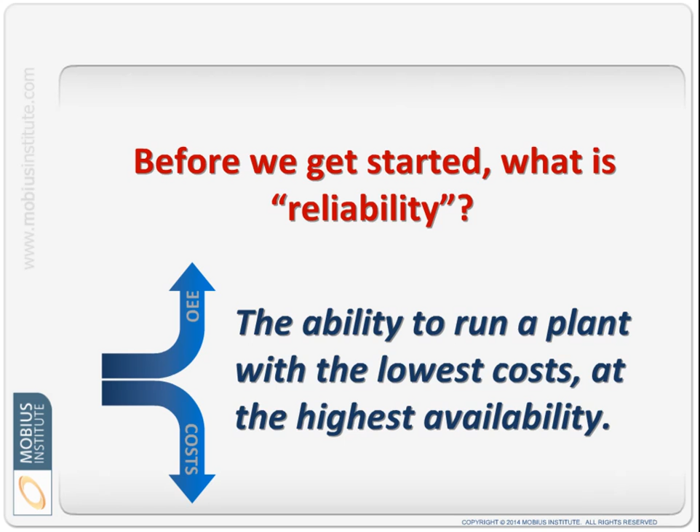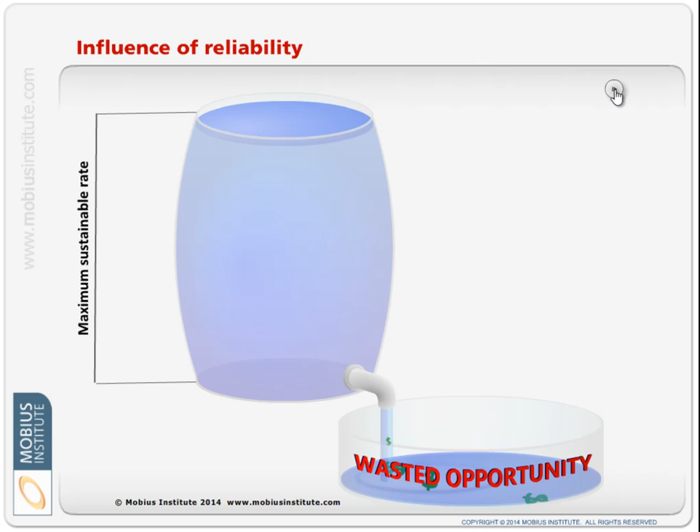Now, one way we could look at our plant is that it ultimately has a maximum sustainable rate, a maximum amount of product that it could ever produce. Now, of course, your particular situation could be different, whether you're a sewage plant or an iron ore mine or a power station. Obviously situations differ, but there's a maximum amount that you could operate. But then we have to subtract from that the scheduled downtime.

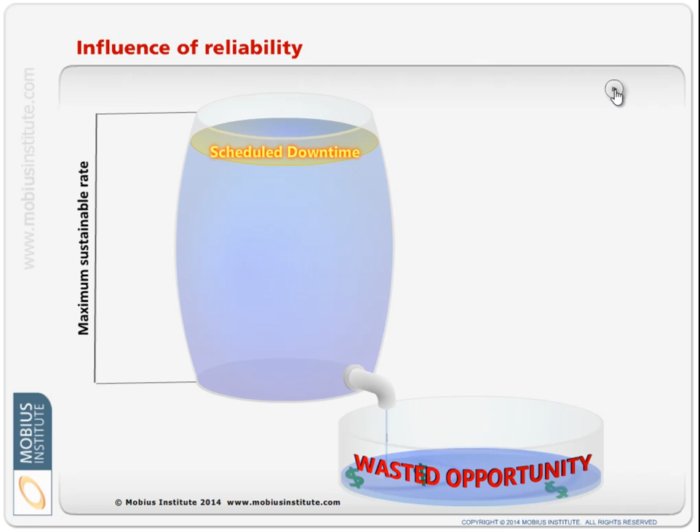And if we had more time to talk about this particular topic, we might see that there's actually a lot of scheduled downtime that didn't need to be scheduled. There's work that's being done that really didn't need to be done. So that's one thing we need to look at. The next thing we need to look at is the unscheduled downtime. What work is being done to machines that we didn't plan on? Equipment failures, those sorts of things that give us our actual availability.

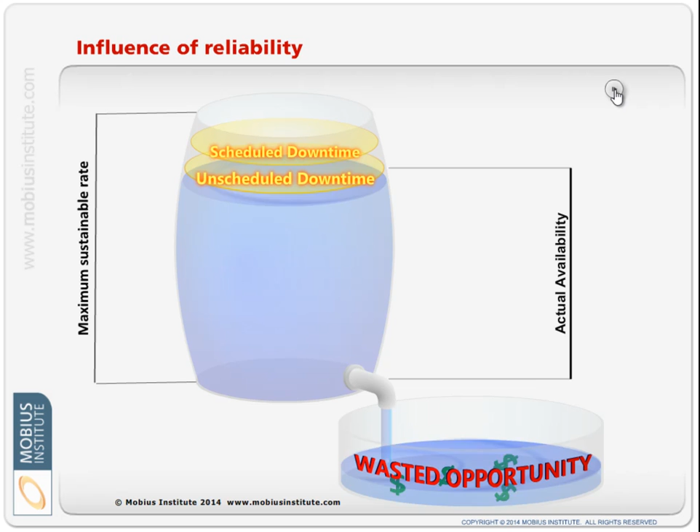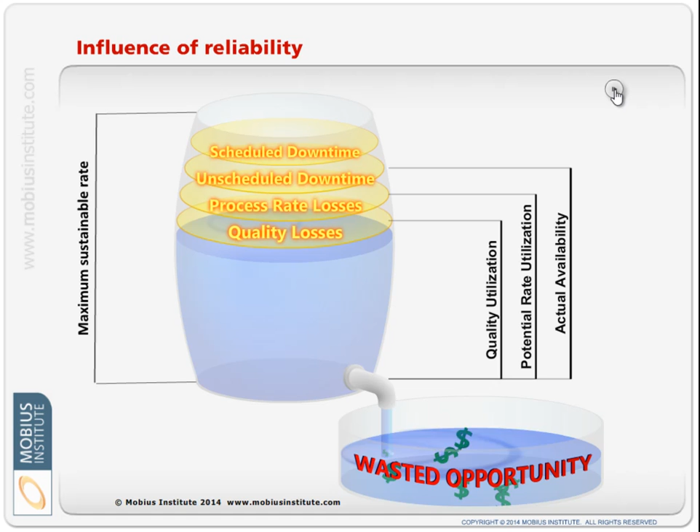So at this point, ideally we are operating our plant less the downtime. But are we able to sell everything that we can produce in that time? Because we might have process rate losses, quality losses, in other words, product that we're having to discard and recycle and so on because it's not saleable, and changeover and transition losses. And there is always the question of how much market demand there is as well.

And this is an interesting point, because you might say, what's reliability got to do with that? If the market doesn't need my product, it doesn't need my product. But for certain industries, it's all about what your sales and marketing organization is willing to try and go out and sell. If they're not confident that the plant can produce the product, they're not going to go out and try and sell the product. When they have more confidence in the plant that, okay, we will make commitments to provide a certain volume of a particular product at a certain quality, they know it can be achieved.

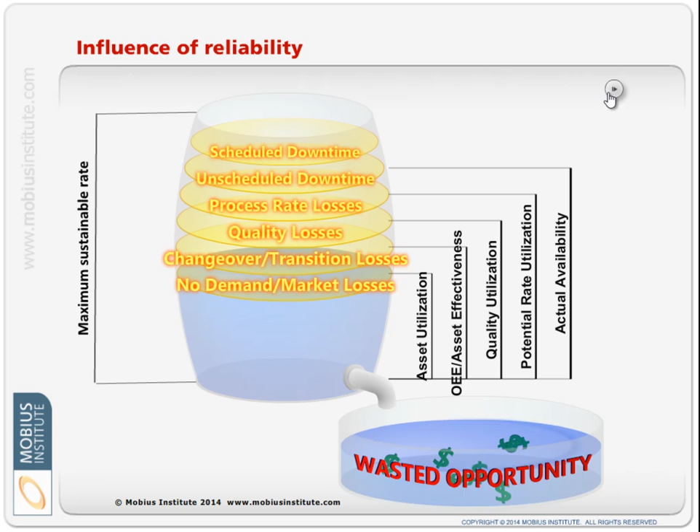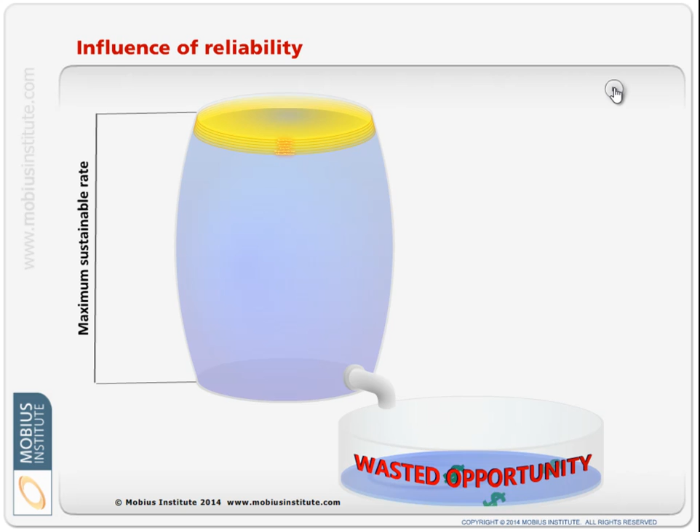Anyway, lots more I'd love to say on this particular topic, but really what we're trying to do with this reliability improvement initiative, we want to affect all of those aspects. We want to achieve the highest level of availability that we possibly can. That might be a little exaggerated how much we've trimmed that down, but you get the gist of what we're trying to do. I'd be curious if you took a moment to think, what did you expect the 5 essential ingredients would be to a successful program.

Some might think that it's all related to the purchase of high-tech equipment, buying the best laser alignment systems and the fanciest vibration monitoring systems and the latest infrared camera and the best filtration equipment and all of that. I don't think it's a technical problem. I used to provide that sort of system. I used to develop that sort of system. That's not the challenge, I think, that really faces you when you're trying to improve reliability in your plant.

The next thing is, maybe you might feel, well, the solution is to outsource the challenge of improving reliability to consultants. So therefore the real challenge and the key element is to find the best consultants at the best price. Now, that's always a good thing, but the question is, should you really be outsourcing this whole initiative to consultants? I'm going to talk more about this later, but personally, I think you have to solve your own problems with assistance from consultants perhaps, but ultimately you have to take responsibility for it. And as I hope I'll convince you in this presentation, it's within your means to do it.

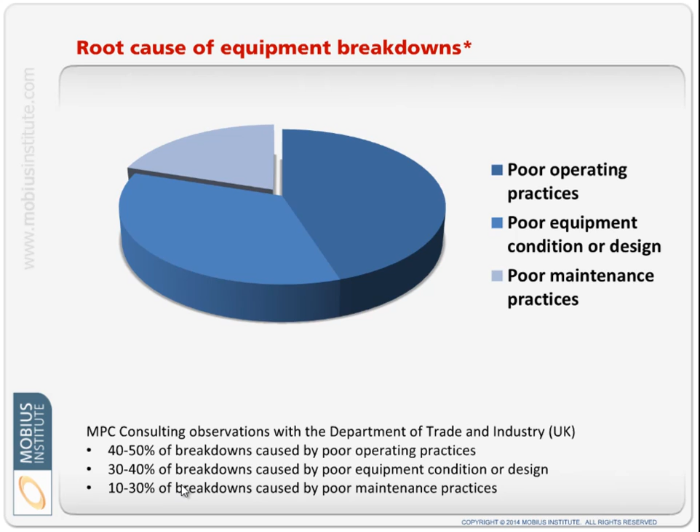So there's your maintenance group that a lot of people point the finger at when it comes to a question of reliability, and they're not responsible for most of the problems. And these sorts of studies have been repeated many times. This one, I'm not actually sure of the origin. It just came from MPC Consulting, as you can see below.

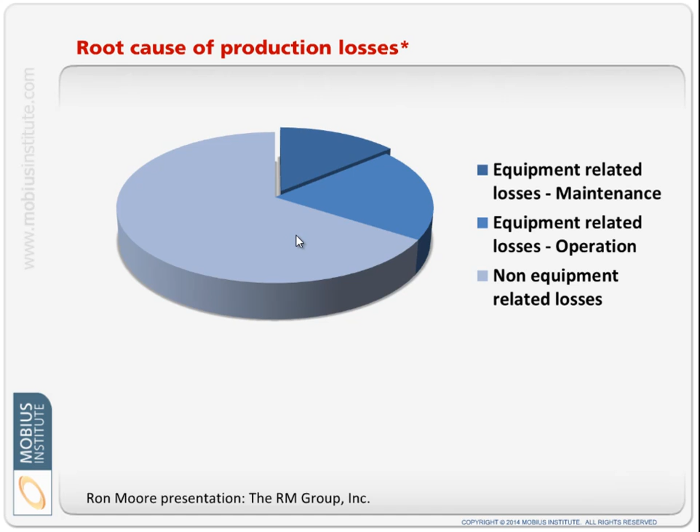But again, a study to look at what was the root cause of production losses. And we can see that we've got this small chunk related to maintenance, a bigger chunk related just purely to operation, and then non-equipment related losses. So there are a lot of reasons why you might have production problems, and it's not all about the maintenance of that equipment. It's not to say we don't want to take care of maintenance issues and make sure we're doing the best possible job, but if that's your only focus, you're not going to achieve the best possible results.

So, step number 2, element number 2. You have to take a long-term view. Anyone that just thinks, well, I'm going to do something for a little while and fix this problem, it's just not going to happen that way. There is no quick fix. It's not a project that we're going to do for 18 months, and at the end of the 18 months we just won't experience problems anymore.

There's no doubt that there are a lot of little things we can do, and they will have improvements. We will reap the rewards from those changes we make. There may be redesigns of equipment, and we should always reap the rewards from the new design. But there's a lot we can do that will only be effective while we keep the focus on reliability improvement. We need to keep seeking out those new opportunities to improve reliability, but keep the focus so that we don't slip back into our old practices.

So as part of this, you need a plan with realistic goals. Don't, as the picture's trying to say, create these really, really lofty and unrealistic goals, because you're going to be frustrated and disappointed. Management's going to be frustrated and disappointed. It's just not the way to do it.

You just have to set realistic goals, but they've got to be long term. But that long-term goal can have lots of little milestones in between, so you can get lots of attaboys along the way, proof that progress is being made, but an understanding that this isn't all going to happen and fix itself in the next 12 months.

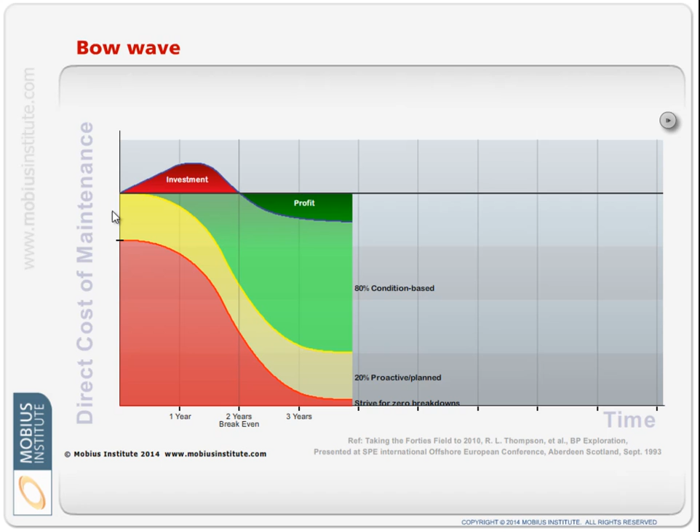Now, this concept of the bow wave has been spoken of before, but here it is graphically. First off, we're going to start with a plant where there's a lot of reactive maintenance, a lot of breakdowns, maybe some planned maintenance, and you've got to ask yourself the question in your situation, what the ratio is between them. And the common belief is, well, you've got to invest a lot of money, or a certain amount of money anyway, before you start reaping the rewards and you get into this profitable area. And it depends how you do that and how quickly you reap the rewards. We can have that discussion, but I would say that there's a slightly different approach to this.

And although it looks a bit funny, the idea is, let's invest a little bit, reap some of the rewards. Invest a little bit, reap the rewards. Invest, reap, invest, etc. And we can continue to do that. And some of that can be before you really get senior management on board. You can get a few runs on the board by making some small changes, go back to management and say, hey, see what we did. Now let's do this as well.

Again, all these topics, I'd love to have more time with you to discuss them, but the other point I wanted to make is that once we do that, and even though I've shown this as a flat line which implies that we're not going to invest anymore, this is the long-term idea, 4 years, 5 years, 6 years, whatever. And if we keep the focus on the reliability improvement initiative and our new reliable culture, and we may continue to make these little investments, well, we'll keep reaping the rewards. But beware of the successful, complacent reliability improvement initiative.

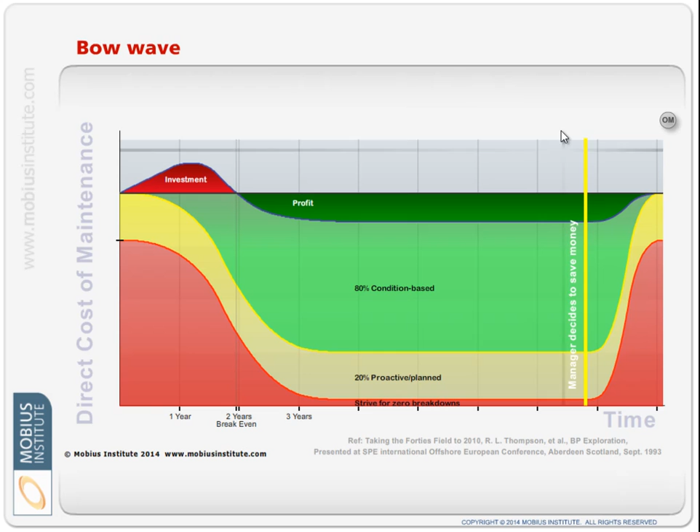You need to continue to sell management and make sure that this person never gets this opportunity. It'd be like someone coming in and saying, hey, I've got this great idea. We don't have many safety incidents. Let's get rid of all these safety practices and meetings and training and whatnot. It's like, what? You're kidding? You can't do that. Well, we should have the same sort of idea with reliability.

Okay, so moving along. You need the senior management support when it comes to the topic of leadership, but you need some sort of reliability leadership group, whatever you want to call it. You do need a group within the organization that is ultimately driving this program.

But that group needs to have the courage to drive the process. They need to lead by example, so they need to stand by their decisions, always think along those reliable ways. But also, when you go out, which you must, and ask operators and mechanics and others, well, what do you know about reliability? Like, what do you see happening that causes equipment to fail?

And I guarantee you'll get all kinds of suggestions. We've been saying this for years. We shouldn't be doing this. And when I do that, this always happens. And when you guys choose those cheap pumps, that's what happens. And you'll get all kinds of suggestions when you ask.

But if you don't listen and follow through, if you don't come back to them either with, fantastic suggestion, we've made this change, and let's see how it does improve things, or if necessary, that was a great suggestion, but for these reasons we just can't do it. We can't get the budget approval, or for some other reasons that person may not understand. It may not be as good an idea, but closing the loop and making sure people understand that you've listened and acted on their suggestions is really important.

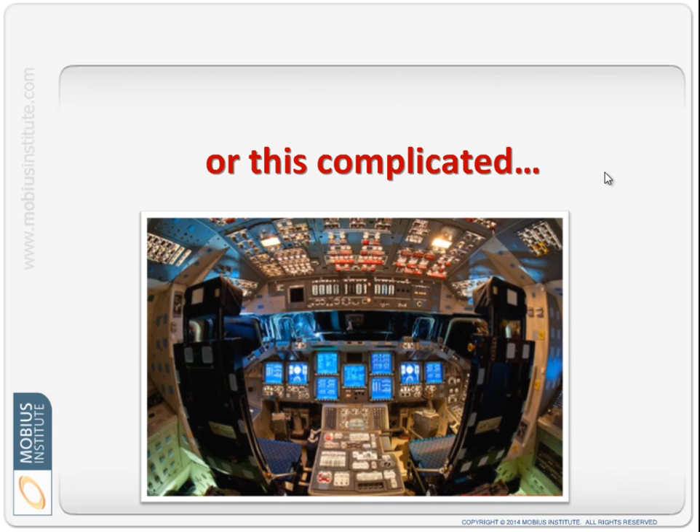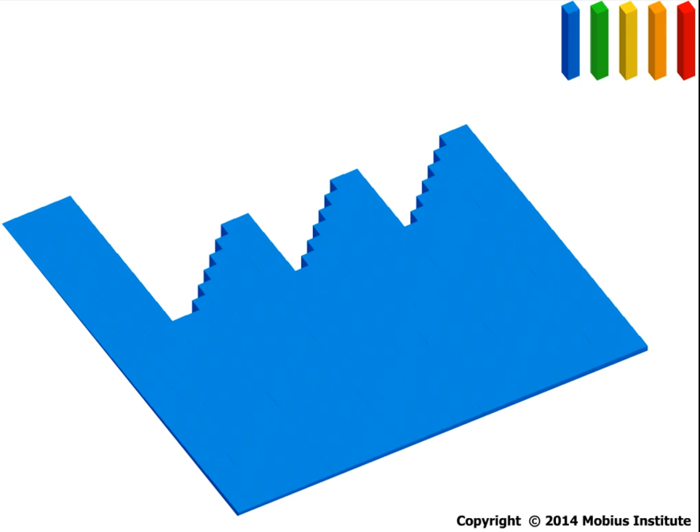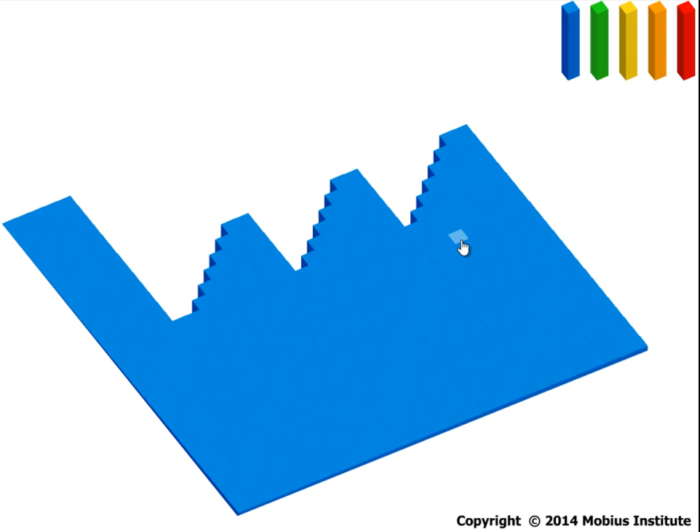I've got this little thing I call pockets of knowledge. So what I'm trying to depict here, this is the company, just made to look like an industrial factory or something. But what we're looking at here is different people's level of knowledge in certain areas. So here, perhaps, is the vibration person who's been off on a Category 2 or Category 3 course, and that person really gets it, is really well trained.

And then maybe over here there's a person who's had some training on root cause failure analysis or something, and maybe there's someone over here who's been trained on some topic as well. But number one, you've got to appreciate that, as I'm trying to show here, the level of knowledge is going to decrease, and therefore you need refresher training.

But the real critical part here is that these little isolated silos, these people who have a certain level of expertise will find it awfully frustrating because the people around them just don't get it. So you can have this great vibration analyst who can pick a bearing fault from a mile away, but when that person talks to operations or other people within the maintenance group, they say, "Oh, yawn, we don't care. Look, when the bearing is really making a lot of noise and it's a real problem and it has to be fixed, then we'll deal with it."

Other people just don't get it. They don't appreciate what that person's trying to do. Same with root cause failure analysis or any other little individual skill. It's not until everyone has a level of understanding, and they all need to have that level of understanding at around the same time. It's no point, for example, you could invite us to come in and do a little seminar in your plant. We get asked to do that all the time.

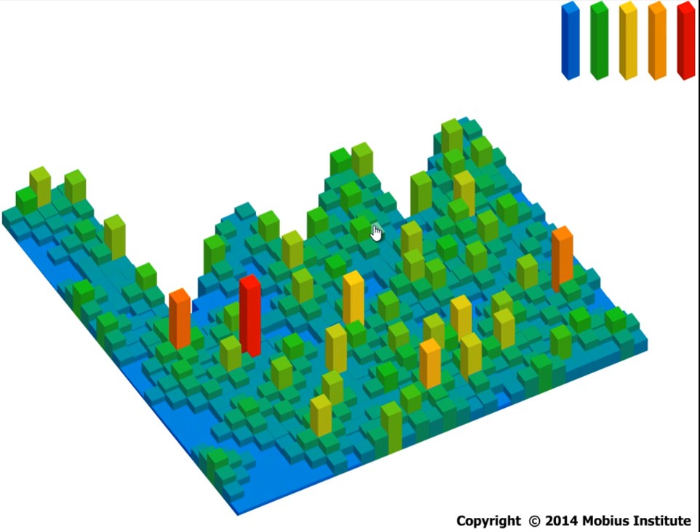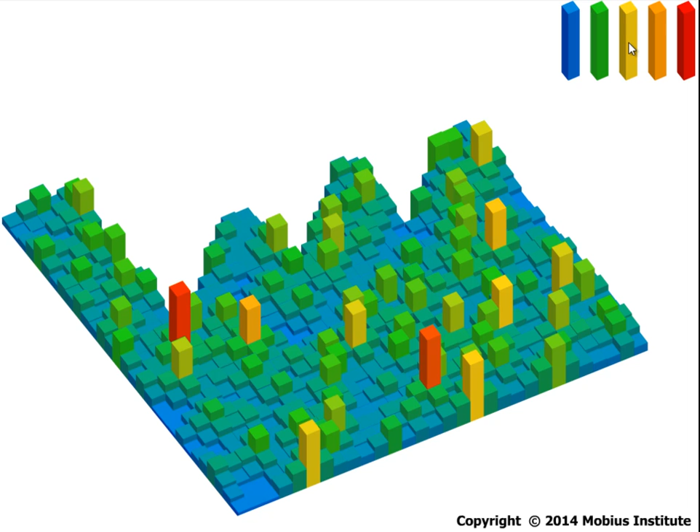It's when everyone understands, and everyone understands about what everyone else is doing, to a sufficient level. That's when the culture changes. That's when you really, really notice a change, and that's when you don't fall back into the old practices. Now, I can click and make all this happen. Obviously, it takes a little time. You roll out training, you do it in a proper way, but I think personally that it's very important.

Now, I'm going to say something else that's controversial here, and there's a lot of training courses around, but I personally feel that there are too many training courses where the aim is not to improve the knowledge of the attendees, it's to sell something, maybe the consulting services, maybe a product or whatever. And again, I've been in this industry 30 years, and you just see a lot of this sort of thing.

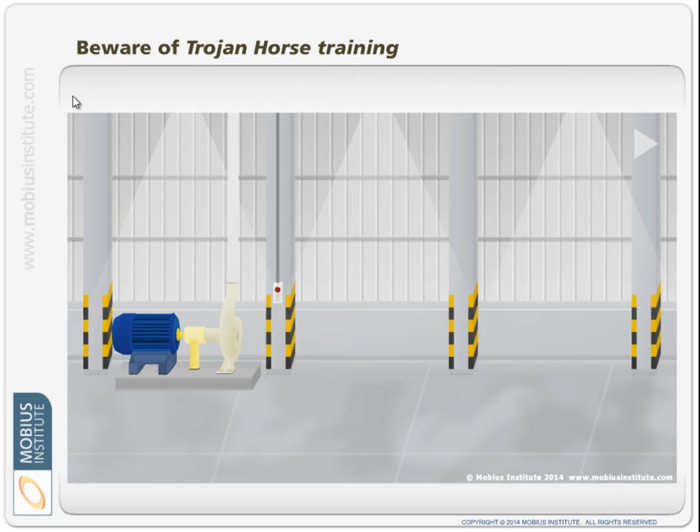So I call it Trojan horse training, where the Acme Training Company come in, it's the training arm of the consulting group, and they say, I'm here to teach you. I will empower you with great knowledge and wisdom so that you can go off and do this yourself.

And look, I don't want to generalize, because there are people who do good training, and yep, if you need them to come in and give you a little bit of help, they do, and that's terrific. Give you a little bit of help to fill in any gaps and set you on your way to be successful. But too many times you see training and it just seems like it's deliberately complicated or deliberately vague,

and what's really happening is, when the lights go out, the consultants appear. I'm not going to say where they appear from, and that's the end game. Oh, you're having trouble with that? Well, let us do it. We sell that equipment that you need. We can do the audits and tell you what you need, and then provide you with the equipment. If you really, really can't do it yourself, fine, get that assistance. It's just not rocket science.

You can do it. Now, just stepping back for a second, I must admit, when putting this presentation together and thinking about the 5 essential elements, there's actually 2 paths I could have taken. Obviously, you've seen the path that I did take. I think it's worth just mentioning something else, because if I looked at any organization that was trying to go down this journey, I would say that there are sort of a more practical, if I can put it that way, or the building blocks that you need.

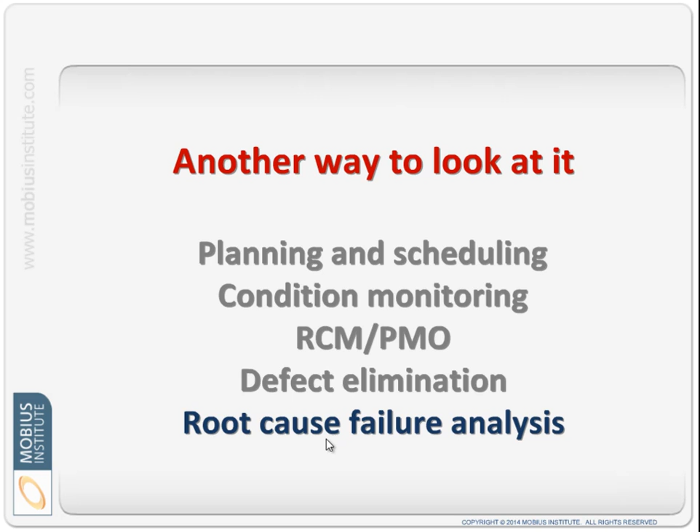And then there is the issue of root cause failure analysis. Take care of all the low-hanging fruit, look at your maintenance practices, but when equipment fails, make sure you are asking the question, why did that happen? Is it preventable? And is it economically justified to prevent it? They're important things. So, in conclusion,

I clearly believe that education, senior management support, taking a long-term view, the need to own your own future, and developing a reliability culture are all important. But this time I've got them in a slightly different order, because I believe that education is at the root of all of them. If you take care of education and start building the belief and building the knowledge and acquiring the skills, that gives you the ability to convince and sell senior management, and you will achieve that through an education process.

And once you have that senior management support, then you can take a much longer term view. They should appreciate we're not going to fix this overnight. We can make these little incremental improvements which all have a reasonable payback. And a lot of times, when I talk about a payback, there may not be much of an investment. When I just talked about planning and scheduling, if you don't have a CMMS system, you don't have to jump out and buy SAP. Hey, we've got a little spreadsheet you can use. I don't want to trivialize it, but you can take baby steps and get some runs on the board. It just depends what your starting point is.